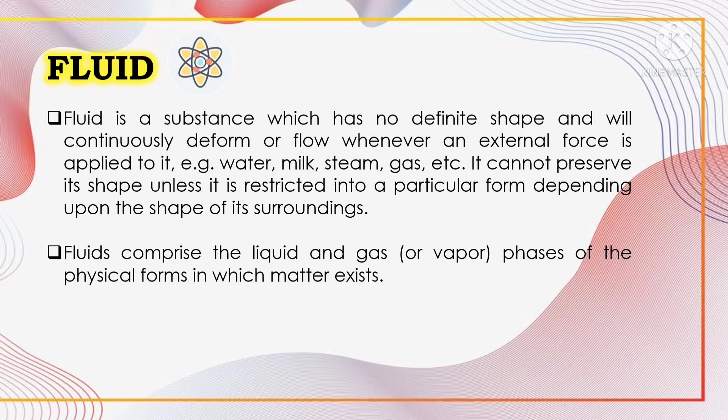So let us first define what is a fluid. You will recall from physics that a substance exists in three primary phases: solid, liquid, and gas. We already have a common sense idea of when we are working with a fluid as opposed to a solid. Fluids tend to flow when we interact with them, while solids tend to deform or bend. Fluid is a substance which has no definite shape and will continuously deform or flow whenever an external force is applied to it. It cannot preserve its shape unless it is restricted into a particular form depending upon the shape of its surroundings. Fluids comprise the liquid and gas phases of physical forms in which matter exists.

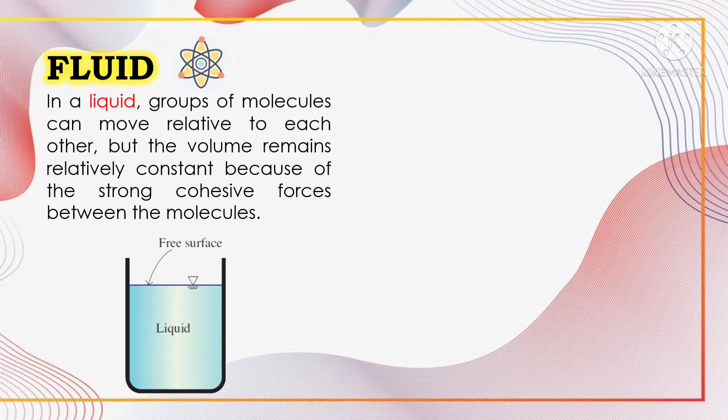In a liquid, groups of molecules can move relative to each other, but the volume remains relatively constant because of the strong cohesive forces between the molecules. As a result, a liquid takes the shape of the container it is in, and it forms a free surface in a larger container in a gravitational field.

On the other hand, a gas expands until it encounters the walls of the container and fills the entire available space. This is because the gas molecules are widely spaced and cohesive forces between them are very small. Unlike liquids, a gas in an open container cannot form a free surface.

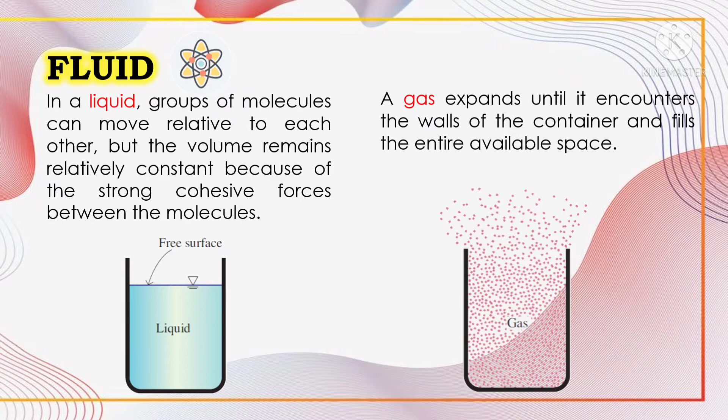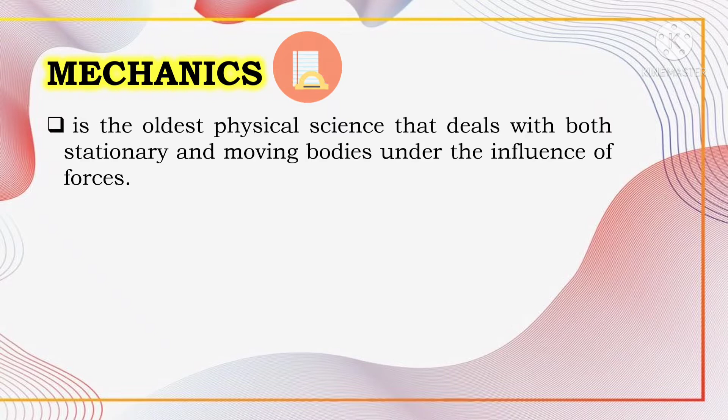So what about the mechanics? Mechanics is the oldest physical science that deals with both stationary and moving bodies under the influence of forces. The branch of mechanics that deals with bodies at rest is called statics, while the branch that deals with bodies in motion is called dynamics.

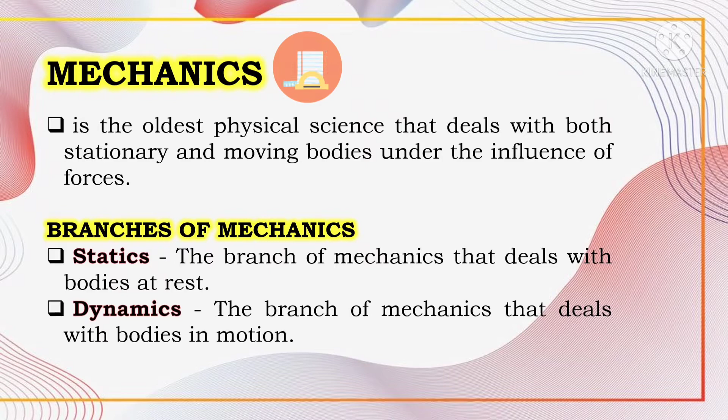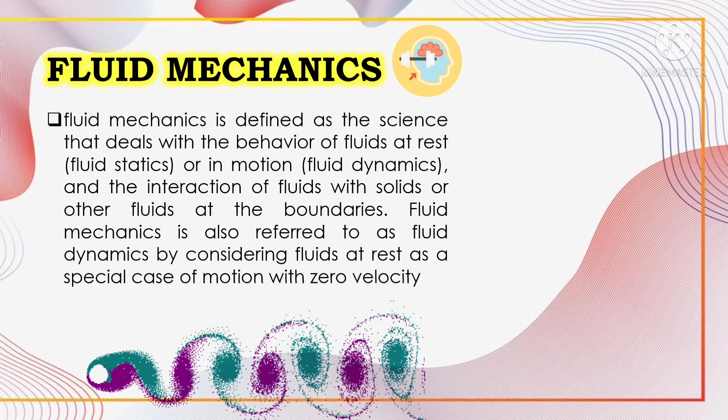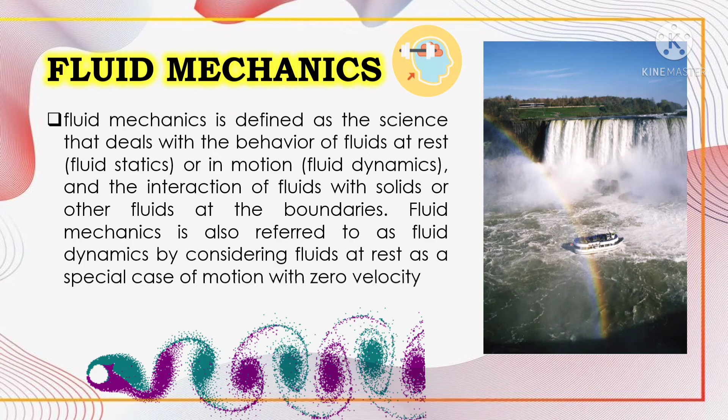So now let us define fluid mechanics. Fluid mechanics is the science that deals with the behavior of fluids at rest or in motion, and the interaction of fluids with solids or other fluids at the boundaries. Fluid mechanics is also referred to as fluid dynamics by considering fluids at rest as a special case of motion with zero velocity.

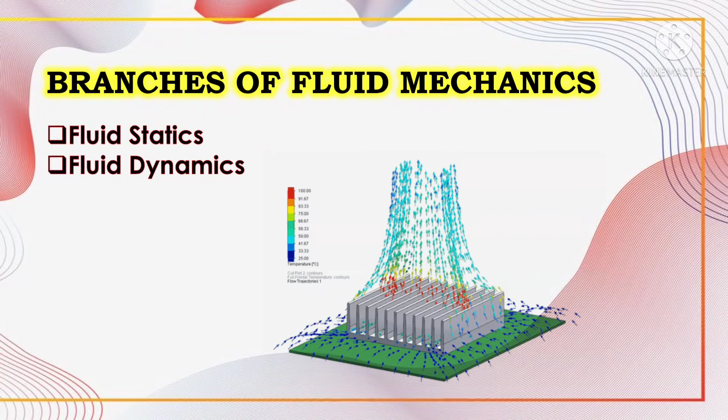There are two branches of fluid mechanics: first is fluid statics, and the second is fluid dynamics. Fluid statics, or hydrostatics, is the branch of fluid mechanics that studies fluids at rest. It embraces the study of the conditions under which fluids are at rest in stable equilibrium, and is contrasted with fluid dynamics, the study of fluids in motion.

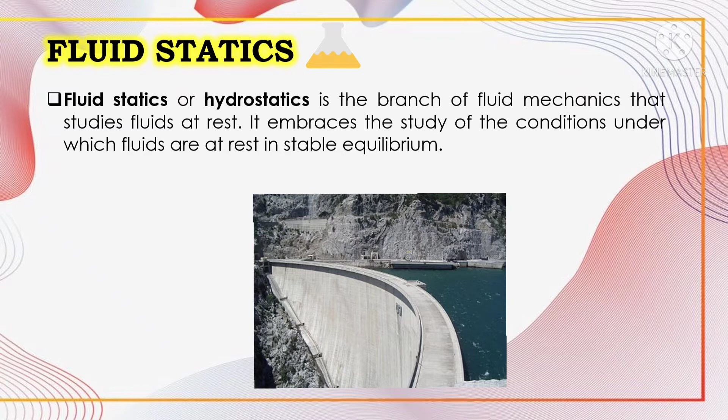Hydrostatics offers physical explanations for many phenomena of everyday life, such as why atmospheric pressure changes with altitude, why wood and oil float on water, and why the surface of water is always level whatever the shape of its container.

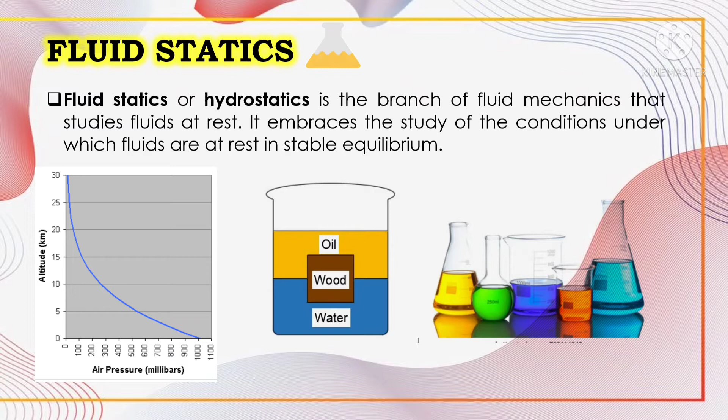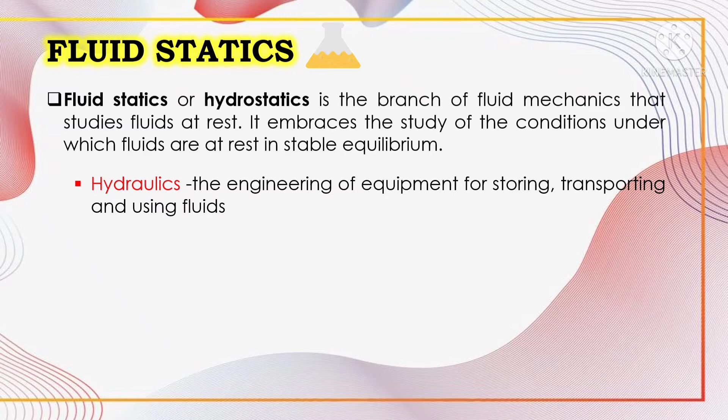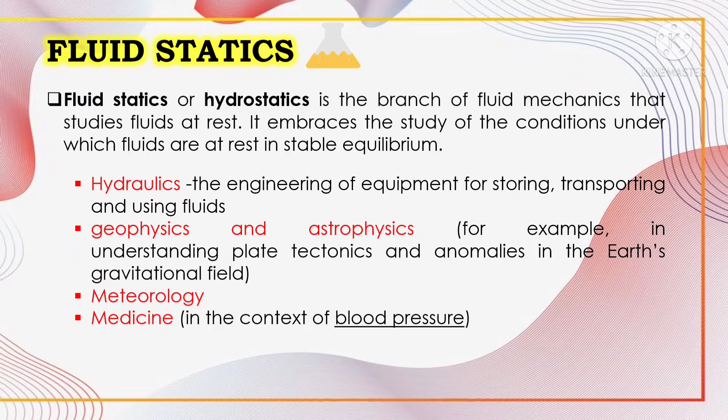Hydrostatics is fundamental to hydraulics, the engineering of equipment for storing, transporting, and using fluids. It is also relevant to some aspects of geophysics and astrophysics, for example in understanding plate tectonics and anomalies in the Earth's gravitational field, as well as meteorology, medicine in the context of blood pressure, and many other fields.

Fluid dynamics is a subdiscipline of fluid mechanics that deals with fluid flow, the science of liquids and gases in motion. Fluid dynamics offers a systematic structure which underlies these practical disciplines that embraces empirical and semi-empirical laws derived from flow measurement and used to solve practical problems.

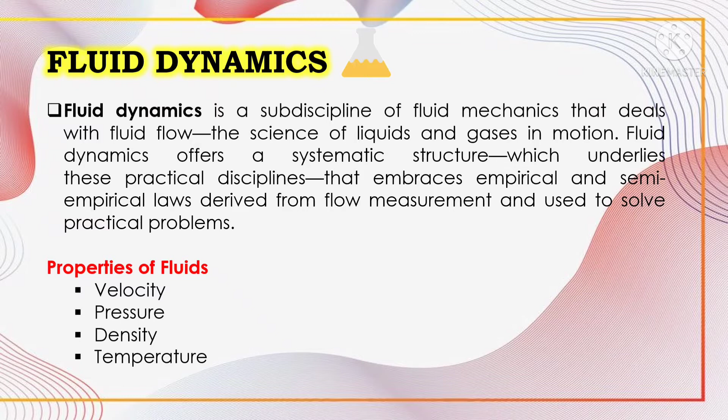The solution to a fluid dynamics problem typically involves calculating various properties of fluids such as velocity, pressure, density, and temperature as functions of space and time.

Fluid dynamics itself is also divided into several categories. The study of motion of fluids that are practically incompressible, such as liquids, especially water, and gases at low speeds, is usually referred to as hydrodynamics. A subcategory of hydrodynamics is hydraulics, which deals with liquid flows in pipes and open channels.

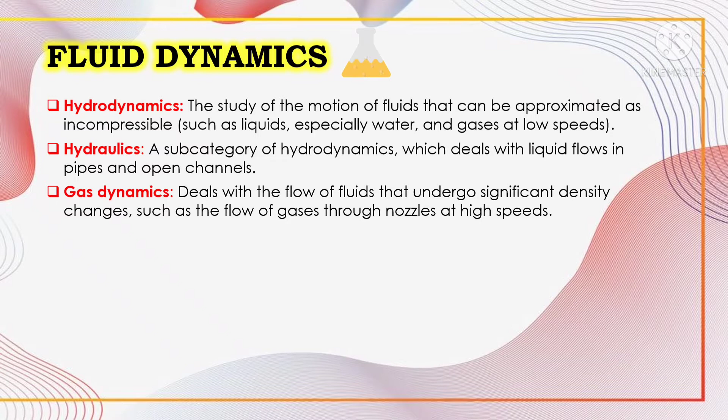Gas dynamics deals with the flow of fluids that undergo significant density changes, such as the flow of gases through nozzles at high speeds. The category aerodynamics deals with the flow of gases, especially air, over bodies such as aircraft, rockets, and automobiles at high or low speeds. Some other specialized categories such as meteorology, oceanography, and hydrology deal with naturally occurring flows.

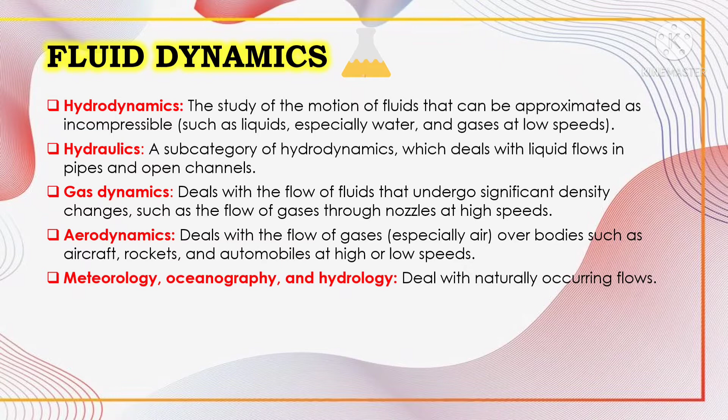So now, let us know the history of fluid mechanics. Here are the key theories in its history. During 390 BC, Plato, a Greek philosopher, describes the origins of rivers as water escaping through holes in the ground. In 250 BC, Archimedes publishes Floating Bodies, in which he discusses the principles of buoyancy and hydrostatics.

In 200 BC, Chinese scholars discovered that tides are connected to the lunar cycle. In 100 BC, Greek philosopher Poseidonius discovers tides are connected to the lunar cycle. During 1643 AD, Evangelista Torricelli develops the relationship between pressure and velocity of fluids for free jets. In 1738 AD, Daniel Bernoulli publishes Hydrodynamica, which discusses the pressure and velocity of fluids and delineates the Bernoulli equation.

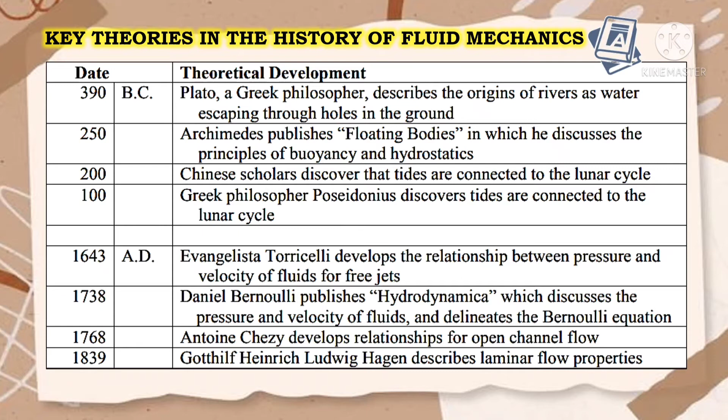In 1768, Antoine Chezy develops relationships for open channel flow, and in 1839, Gotthilf Heinrich Ludwig Hagen describes laminar flow properties.

During 1840 AD, Jean-Louis Poiseuille describes laminar flow properties. In 1850 AD, Rudolf Clausius develops the kinetic theory of gases. In 1877 AD, J. Boussinesq describes eddy viscosities in turbulent flows. In 1883, Osborne Reynolds describes the differences between laminar and turbulent pipe flow.

In 1889 AD, R. Manning develops a modified equation describing open channel flow. In 1891 AD, Samuel Langley publishes experiments in aerodynamics. In 1895 AD, Osborne Reynolds describes turbulent shear stresses. In 1904 AD, Ludwig Prandtl develops solutions to the Navier-Stokes equations for boundary layer flow.

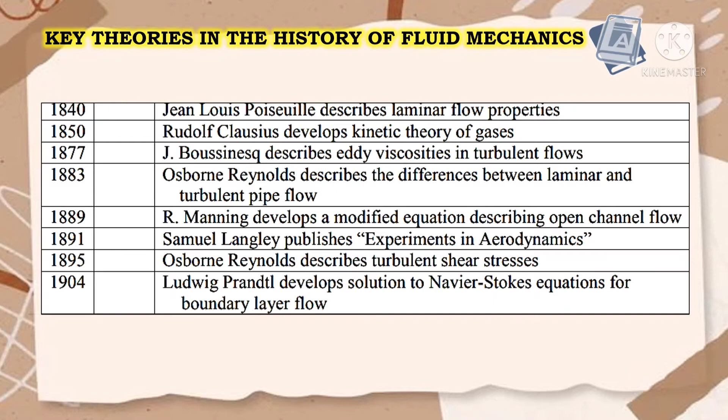During 1908, Paul Richard Heinrich Blasius developed a solution to boundary layer equations for flow past a flat plate. During 1918, Ludwig Prandtl develops theory of flow over airplane wings. In 1919, Robert Goddard publishes a method of reaching extreme altitudes. In 1921, Hermann Oberth publishes The Rocket into Interplanetary Space.

In 1933, J. Nikuradse describes the relationships between pipe flow, friction factor, and Reynolds number. And in 1944, L. Moody summarizes relationships between pipe flow, friction factor, and Reynolds number, and develops the Moody chart.

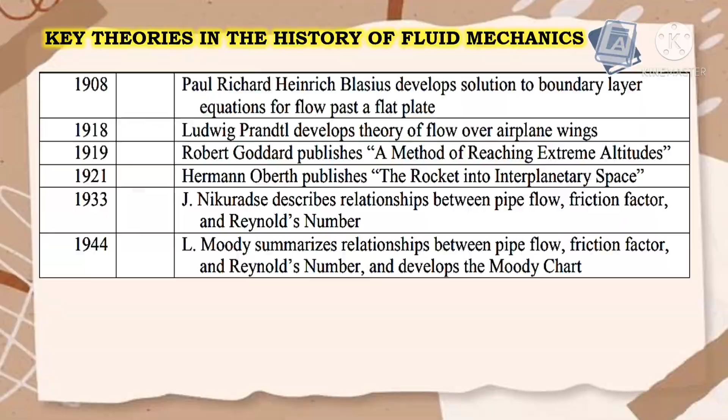Fluid mechanics is widely used both in everyday activities and in the design of modern engineering systems, from vacuum cleaners to supersonic aircraft. Therefore, it is important to develop a good understanding of the basic principles of fluid mechanics.

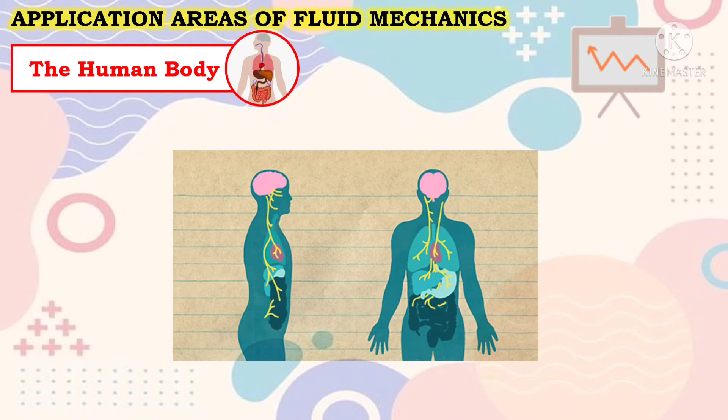To begin with, fluid mechanics plays a vital role in the human body. The heart is constantly pumping blood to all parts of the body through the arteries and veins, and the lungs are the sites of airflow in alternating direction. Needless to say, all artificial hearts, breathing machines, and dialysis systems are designed using fluid dynamics.

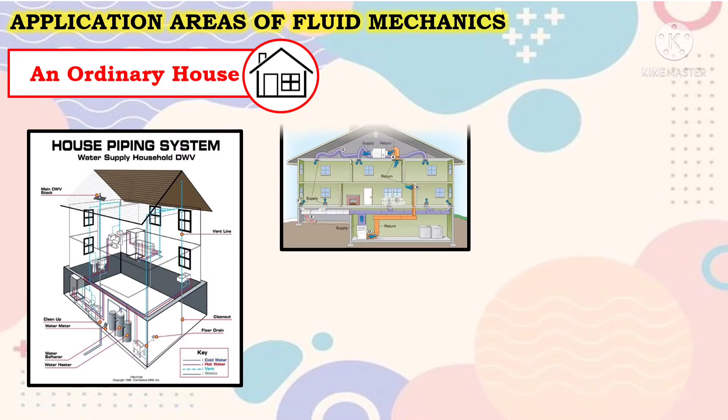An ordinary house is, in some respects, an exhibition hall filled with applications of fluid mechanics. The piping system for cold water and natural gas, and sewage for an individual house and the entire city, are designed primarily on the basis of fluid mechanics. The same is also true for the piping and ducting network of heating and air conditioning systems.

A refrigerator involves tubes through which the refrigerant flows, a compressor that pressurizes the refrigerant, and two heat exchangers where the refrigerant absorbs and rejects heat. Fluid mechanics plays a major role in the design of all these components. Even the operation of an ordinary faucet is based on fluid mechanics.

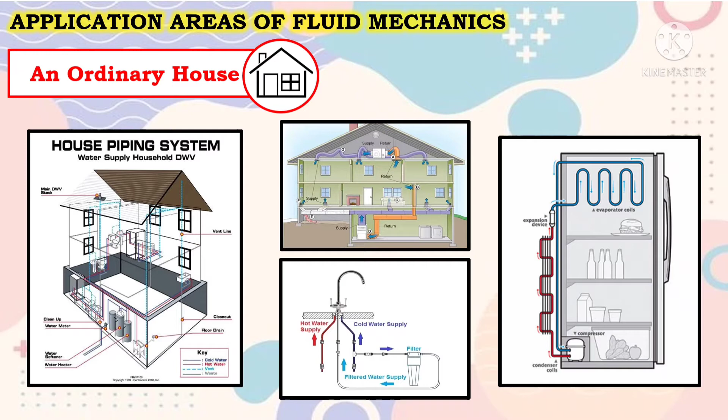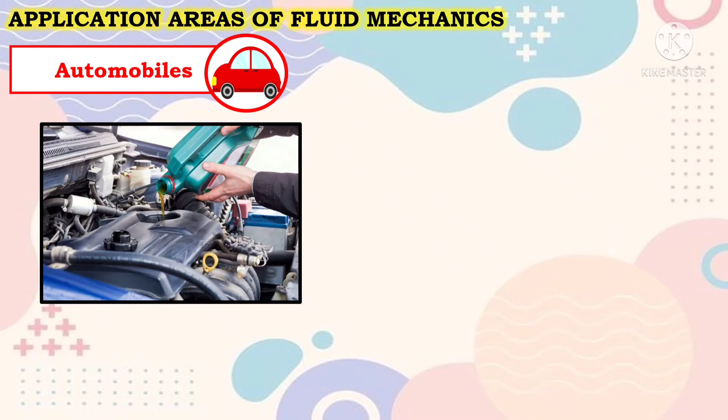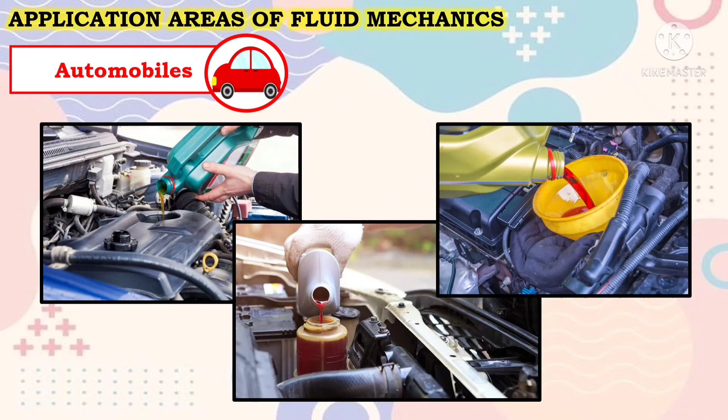We can also see numerous applications of fluid mechanics in an automobile. All components associated with the transportation of fuel from the fuel tank to the cylinders—the fuel line, the fuel pump, fuel injectors, or the carburetors—as well as the mixing of fuel and air in the cylinders and the purging of combustion gases in the exhaust pipes, are analyzed using fluid mechanics.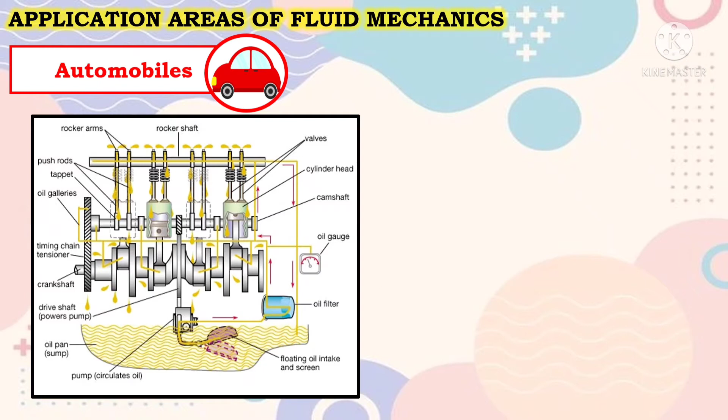Fluid mechanics is also used in the design of the heating and air conditioning system, the hydraulic brakes, the power steering, the automatic transmission, and the lubrication system, the cooling system of the engine block including the radiator and the water pump, and even the tires.

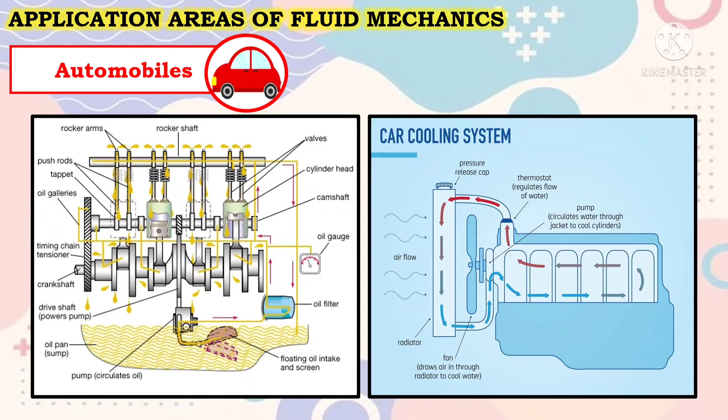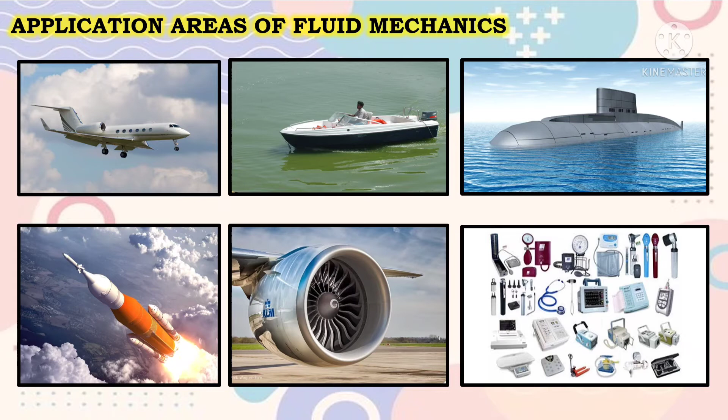On a broader scale, fluid mechanics plays a major part in the design and analysis of aircraft, boats, submarines, rockets, jet engines, wind turbines, and biomedical devices, the cooling of electronic components, and the transportation of water, crude oil, and natural gas. It is also considered in the design of bridges, buildings, and even billboards, to make sure that the structures can withstand wind loading.

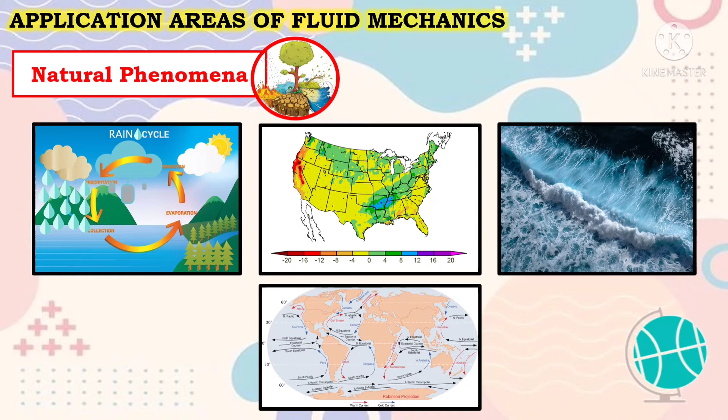Numerous natural phenomena, such as the rain cycle, weather patterns, the rise of groundwater to the top of trees, winds, ocean waves, and the currents in large water bodies, are also governed by the principles of fluid mechanics.

Fluid flow is often confined by solid surfaces, and it is important to understand how the presence of solid surfaces affects fluid flow. We know that water in a river cannot flow through large rocks and goes around them. That is, the water velocity normal to the rock surface must be zero, and water approaching the surface normally comes to a complete stop at the surface.

What is not so obvious is that water approaching the rock at any angle also comes to a complete stop at the rock surface, and thus the tangential velocity of water at the surface is also zero. Consider the flow of a fluid in a stationary pipe or over a solid surface that is non-porous or impermeable to the fluid. All experimental observations indicate that a fluid in motion comes to a complete stop at the surface and assumes a zero velocity relative to the surface.

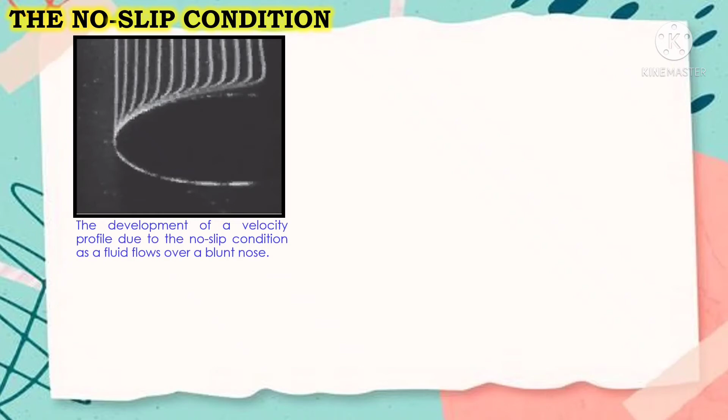A fluid layer adjacent to a moving surface has the same velocity as the surface. A consequence of the no-slip condition is that all velocity profiles must have zero values with respect to the surface at the points of contact between the fluid and a solid surface. Another consequence of the no-slip condition is surface drag, which is the force a fluid exerts on a surface in the flow direction.

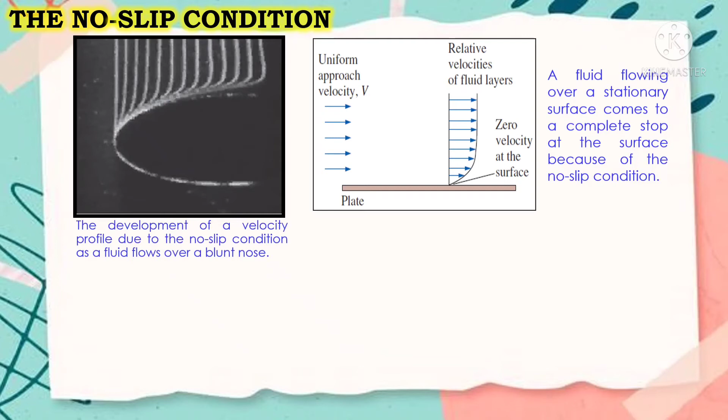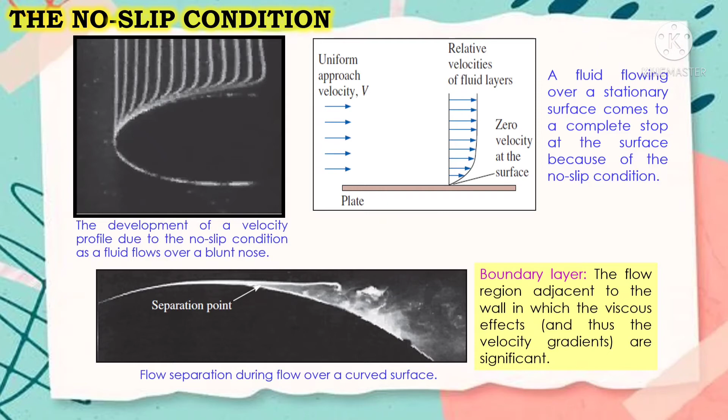When a fluid is forced to flow over a curved surface, such as the backside of a cylinder, at sufficiently high velocity the boundary layer can no longer remain attached to the surface, and at some point it separates from the surface, a process called flow separation. We emphasize that the no-slip condition applies everywhere along the surface, even downstream of the separation point.

Earlier, we defined fluid mechanics as the science that deals with the behavior of fluids at rest or in motion, and the interaction of fluids with solids and other fluids at the boundaries. There is a wide variety of fluid flow problems encountered in practice, and it is usually convenient to classify them on the basis of some common characteristics to make it feasible to study them in groups. There are many ways to classify fluid flow problems, and here are some general categories.

First is the viscous and inviscid regions of flow. When two fluid layers move relative to each other, a friction force develops between them, and the slower layer tries to slow down the faster layer. This internal resistance to flow is quantified by the fluid property called viscosity, which is the measure of internal stickiness of the fluid. Viscosity is caused by cohesive forces between molecules in liquids and by molecular collisions in gases.

There is no fluid with zero viscosity, and thus all fluid flows involve viscous effects to some degree. Flows in which the frictional effects are significant are called viscous flows. However, in many flows of practical interest there are regions where viscous forces are negligibly small compared to the inertial or pressure forces.

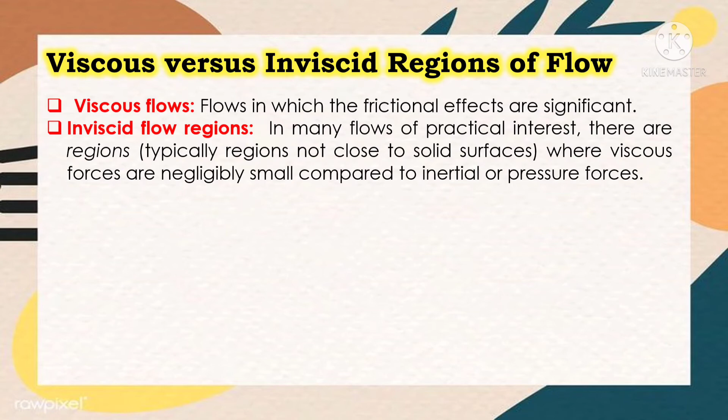Neglecting the viscous terms in such inviscid flow regions greatly simplifies the analysis without much loss in accuracy. Consider the development of viscous and inviscid regions of flow as a result of inserting a flat plate parallel into a fluid stream of uniform velocity, as shown in the picture below. The fluid sticks to the plate on both sides because of the no-slip condition, and the thin boundary layer in which the viscous effects are significant near the plate surface is the viscous flow region. The region of flow on both sides away from the plate, unaffected by the presence of the plate, is the inviscid flow region.

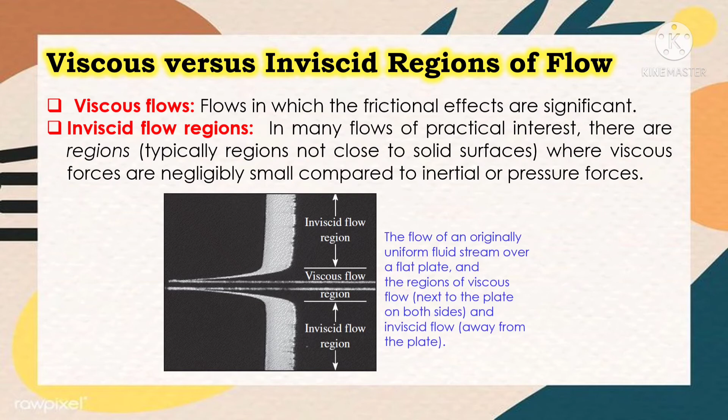A fluid flow is classified as being internal or external, depending on whether the fluid is forced to flow in a confined channel or over a surface. The flow of an unbounded fluid over a surface such as a plate, a wire, or a pipe is external flow. The flow in a pipe or duct is internal flow if the fluid is completely bounded by solid surfaces.

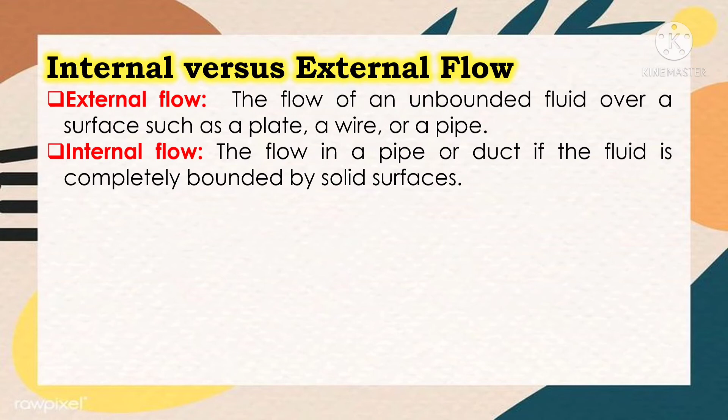Water flow in a pipe, for example, is internal flow, and airflow over a ball or over an exposed pipe during a windy day is external flow.

Internal flows are dominated by the influence of viscosity throughout the flow field. In external flows, the viscous effects are limited to boundary layers near solid surfaces and to wake regions downstream of bodies.

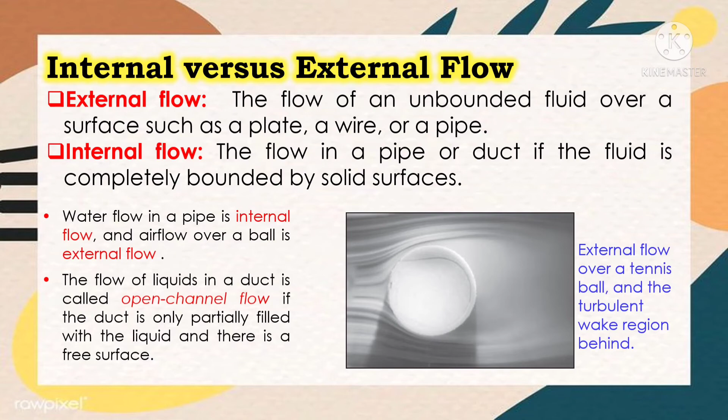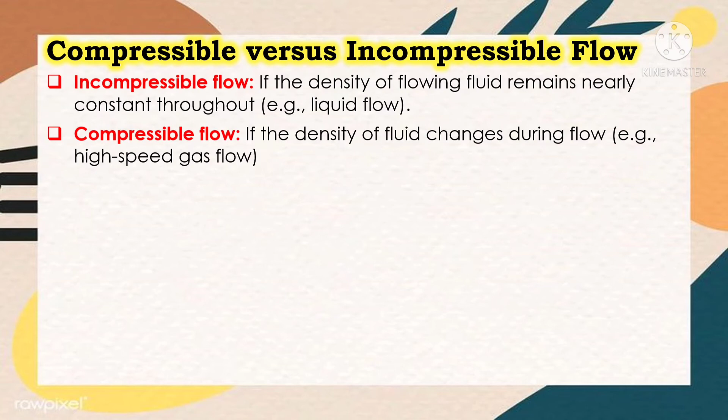The flow is classified as being compressible or incompressible depending on the level of variation of density during flow. Incompressibility is an approximation, and a flow is said to be incompressible if the density remains nearly constant throughout. Therefore, the volume of every portion of fluid remains unchanged over the course of its motion when the flow is incompressible. The densities of liquids are essentially constant, and thus the flow of liquid is typically incompressible. Therefore, liquids are usually referred to as incompressible substances.

When analyzing rockets and spacecraft and other systems that involve high-speed gas flows, the flow speed is often expressed in terms of the dimensionless Mach number, defined as speed of flow divided by speed of sound. The speed of sound has a value of 346 meters per second in air at room temperature at sea level.

The flow is called sonic when the Mach number is equal to 1, and the flow is called subsonic if the Mach number is less than 1. The flow is called supersonic if the Mach number is greater than 1, and the flow is called hypersonic if the Mach number is much greater than 1.

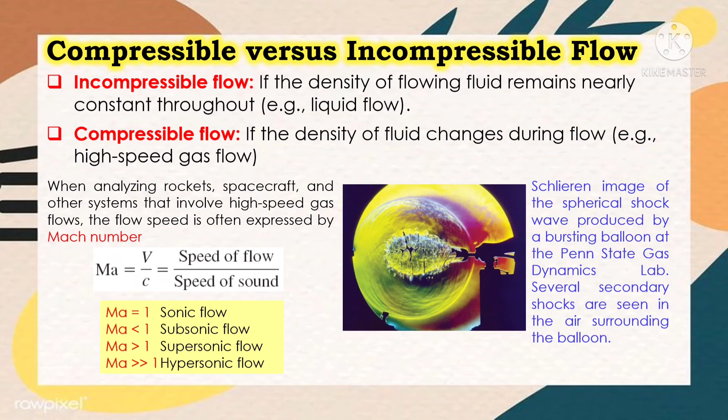Some flows are smooth and orderly, while others are rather chaotic. The highly ordered fluid motion characterized by a smooth layer of fluid is called laminar. The word laminar comes from the movement of adjacent fluid particles together in laminates. The flow of high viscosity fluids such as oils at low velocities is typically laminar.

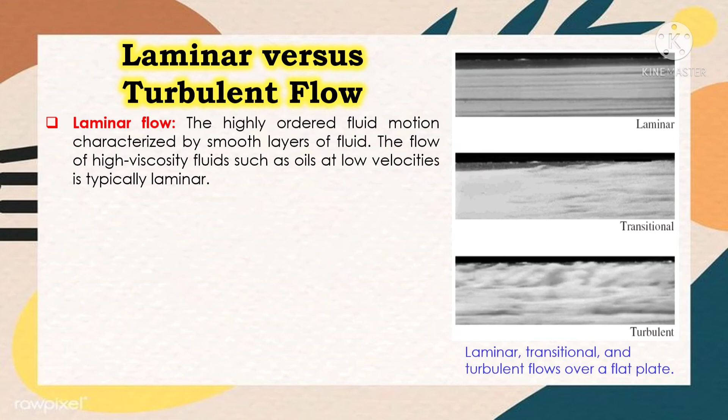The highly disordered fluid motion that typically occurs at high velocities and is characterized by velocity fluctuations is called turbulent. The flow of low viscosity fluids such as air at high velocities is typically turbulent. The flow regime greatly influences the required power for pumping. A flow that alternates between being laminar and turbulent is called transitional.

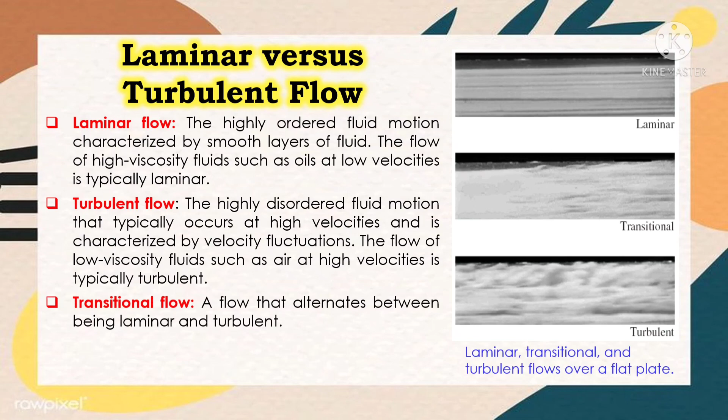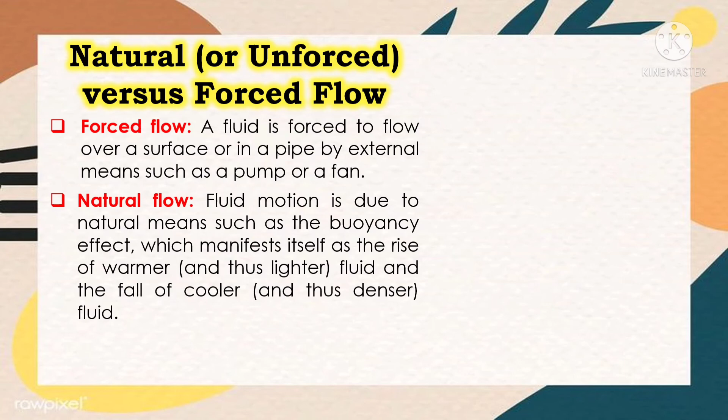A fluid flow is said to be natural or forced depending on how the fluid motion is initiated. In forced flow, a fluid is forced to flow over a surface or in a pipe by external means, such as a pump or a fan. In natural flows, any fluid motion is due to natural means such as the buoyancy effect, which manifests itself as the rise of warmer fluid and the fall of the cooler fluid.

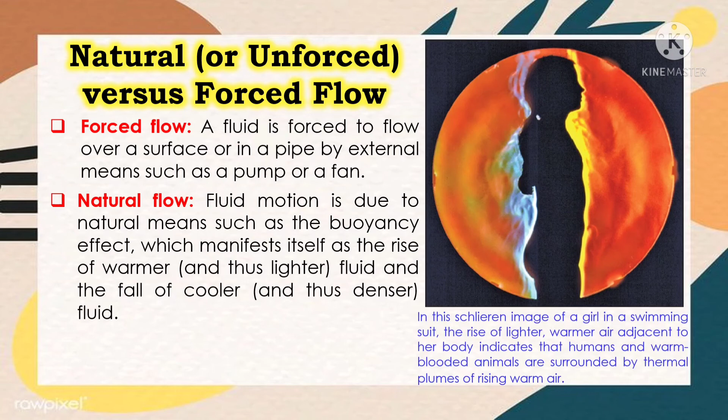Next is the steady versus unsteady flow. The term steady implies no change at a point with time. The opposite of steady is unsteady. The term uniform implies no change with location over a specified region. These meanings are consistent with their everyday use.

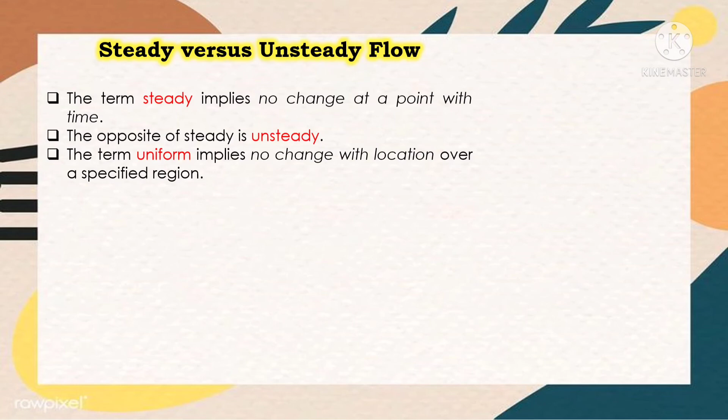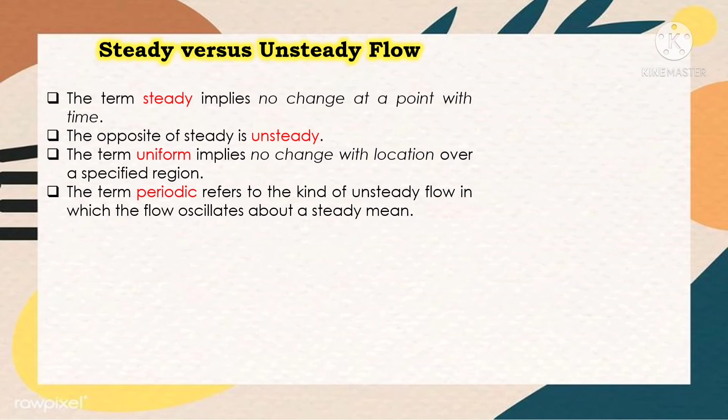The terms unsteady and transient are often used interchangeably, but these terms are not synonyms. In fluid mechanics, unsteady is the most general term that applies to any flow that is not steady, but transient is typically used for developing flows. When a rocket engine is fired up, for example, there are transient effects. The pressure builds up inside the rocket engine and the flow accelerates until the engine settles down and operates steadily.

The term periodic refers to the kind of unsteady flow in which the flow oscillates about a steady mean. Many devices such as turbines, compressors, boilers, condensers, and heat exchangers operate for a long period of time under the same conditions, and they are classified as steady flow devices. Note that the flow field near the rotating blades of a turbo machine is of course unsteady, but we consider the overall flow field rather than the details at some localities when we classify devices.

During steady flow, the fluid properties can change from point to point within a device, but at any fixed point they remain constant. Therefore, the volume, the mass, and the total energy content of a steady flow device or flow section remain constant in steady operation.

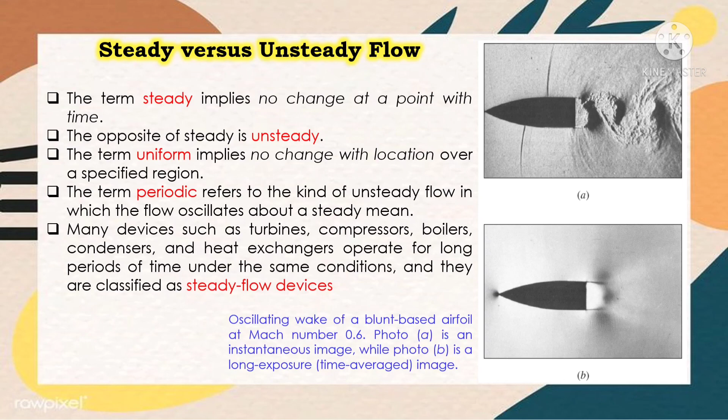A flow field is best characterized by the velocity distribution, and thus a flow is said to be 1, 2, or 3-dimensional if the flow velocity varies in 1, 2, or 3 primary dimensions respectively. Consider a steady flow of a fluid through a circular pipe attached to a large tank. The fluid velocity everywhere on the pipe surface is 0 because of the no-slip condition, and the flow is 2-dimensional in the entrance region of the pipe.

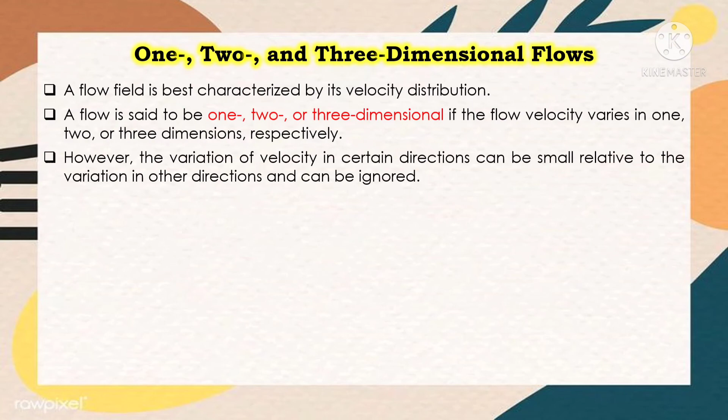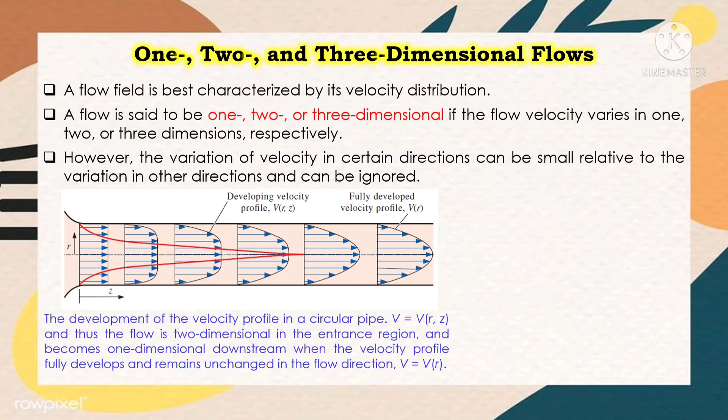Since the velocity changes in both the R and Z directions, the velocity profile develops and remains unchanged after some distance from the inlet. The flow in this region is said to be fully developed.

A flow may be approximated as 2-dimensional when the aspect ratio is large and the flow does not change appreciably along the longer dimension. For example, the flow of air over a car antenna can be considered 2-dimensional except near its end, since the antenna's length is much greater than its diameter and the airflow hitting the antenna is fairly uniform.